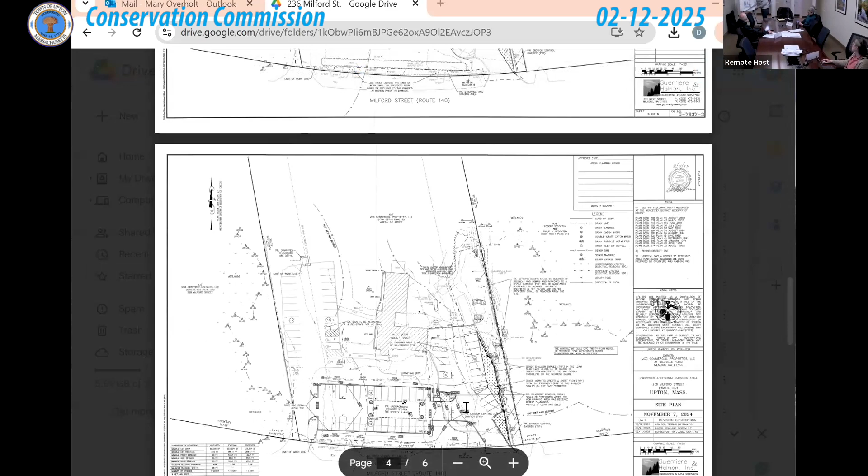And we received the approval from the planning board last night for the proposed set of plans that we have before you this evening.

If you recall, the intent of the project is that a portion of the new parking lot flows to the catch basins in this area, and there was a portion that would flow across the existing parking lot. What we proposed is to take out some impervious area on that side of the parking lot so that we'd make up for the additional asphalt being added that wasn't being captured by the infiltration system. With the removal of those 5 parking spaces, we left everything else the same so that we're more than adequately sized to handle the differential in water quality and things of that nature.

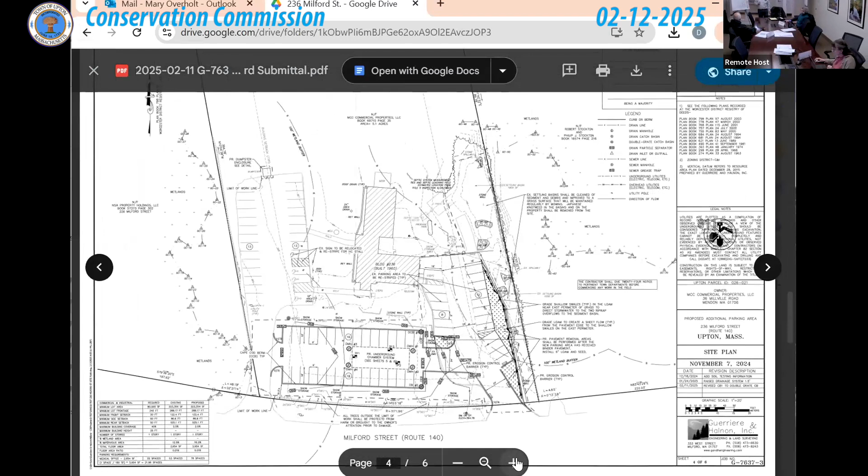So the proposed project is for a parking lot. Mary asked that we take care of the Japanese knotweed, and we propose that on the plan. There are 2 existing basins that haven't been properly maintained since the last time this was brought in, I think in 2015. So the proposed project has taken the original requirements for the O&M. We have a different owner now, so the order of conditions will go forward to direct her so that she maintains this thing properly.

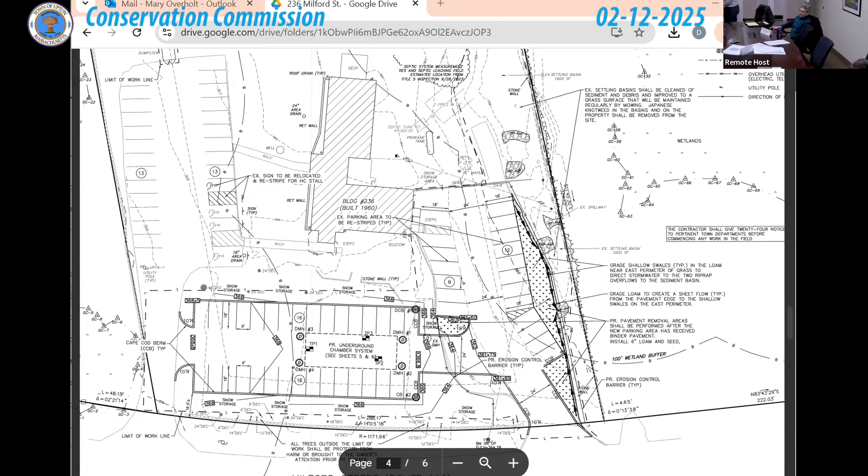So that's my presentation. We didn't add a catch basin, but we were asked to make it a double grate, so we made it a double grate. We were also asked to add an inspection port for the chambers, and we've added that—you can see that this comes to the surface at those 5 locations. So those are the changes that have been made in the site design, and I'll ask if there are any questions from the commission.

Well, thank you. Mary, any questions from you? I think I was looking at it this afternoon. It seems like you took care of all the issues.

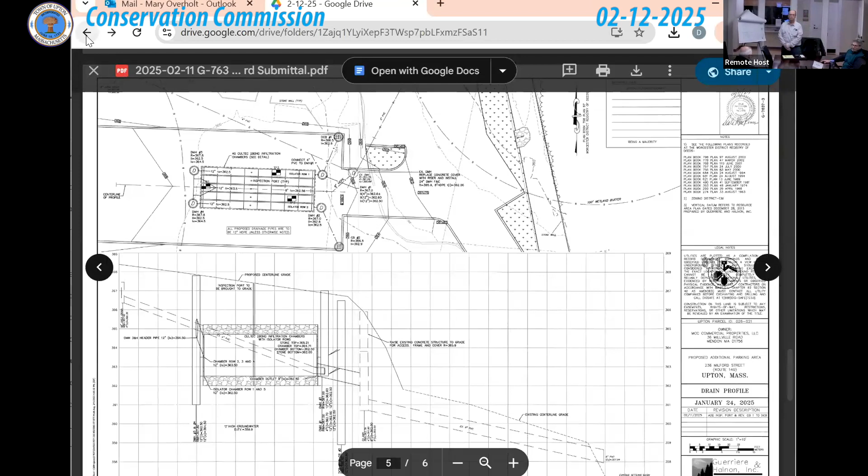Did you look at the DEP? I don't recall what it is right now, could you pull that up? Let's see. The DEP comments were: portions of the site with existing impervious surfaces may be considered redevelopment and need to only meet the Mass stormwater standards to the maximum extent practical, while also providing an improvement to its existing conditions. Portions of the site with newly proposed impervious surfaces must meet the standards fully. The applicant addresses newly proposed impervious surfaces in terms of standard 3 and 4. The applicant should provide calculations for portions of the site where existing impervious surfaces will be altered to demonstrate compliance with standard 3 and 4, and propose improvement to existing conditions. Yes, so we provided that, and that was reviewed by Stantec.

Okay, great. And then test pit data should be provided to Mass DEP. Well, I assumed—I didn't realize we had to go directly to Mass DEP, usually we just provide it to the commission. Okay, and that information is on the plans. And this is why you ended up raising the parking lot, because of the 2-foot separation. That's correct, that's why the parking lot got raised. Right, okay, all right.

And then TSS, I'm sure that Stantec looked at that, right? Yes, we looked at the O&M plan. Great, yeah, I think that was pretty much it.

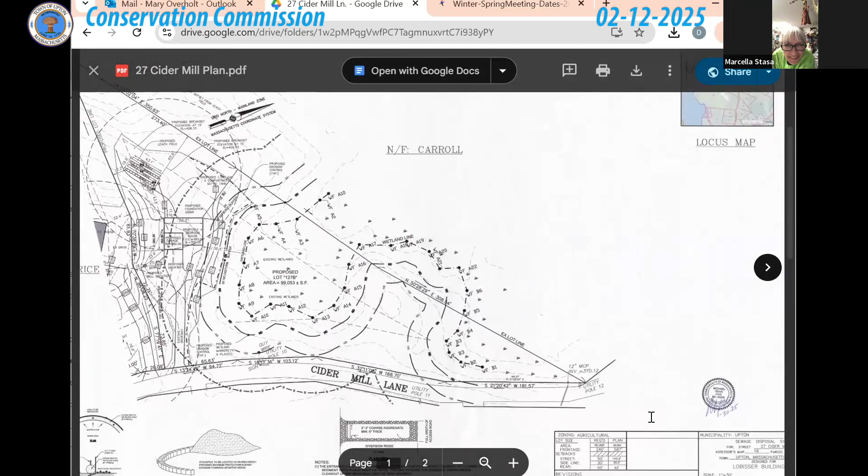That one right when you turn onto Cider Mill, right on the right. That one's actually... or is that a new one? This is a new one. Oh yeah, okay. And that one is more than 100 feet from the wetland.

Yeah, so bounds are right there. But for your dock permit, you need to go through the state for that, chapter 91. And you may have to do a determination with us. It's like a joint process, a determination with us and go to the state.

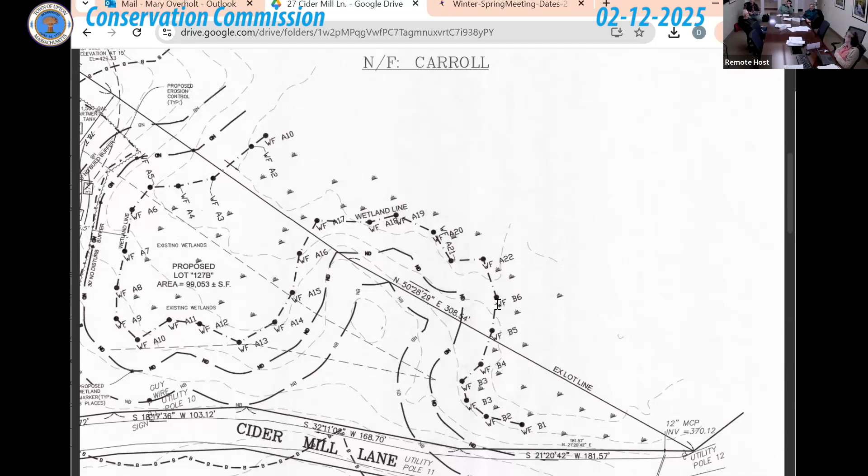Knock down any trees when I'm putting it in, right? More trees down. I didn't think there were 21 or whatever cut down, but then I was walking around and I was like, yeah, maybe. You might have counted them right. Yeah, you should see pictures of what it was like before, you couldn't really see the lake. We did just weeks before, because we saw it in like September, October, before we bought it in December.

Okay, 7:45, notice of intent for 45 Main Street, installation of a lawn drain and grass swale. Notice is hereby given in accordance with the Wetlands Protection Act that the Upton Conservation Commission will hold the following public hearing on Wednesday, February 12th at 7:45 PM: a notice of intent filed by Andrew Pickering for the installation of a lawn drain and grass swale at 45 Main Street.

I can, if Mary doesn't mind, just talk quickly. Hey Pete, it's me, Dave. I can just talk about this one, the next one. The next two projects involve Kevin Lobisser — he's not the applicant, but we're doing all the work and we've done the design work for it. They are two abutters to our 47 Main Street, 40B project. They're not connected to our project at all, not in any of our systems. It's just two pre-existing conditions that we told the ZBA we were going to try to address.

We're going to try to help the problems on each site, as we're trying to be good neighbors. On Forest School Street, we've already planted some trees for them. So we're not asking these neighbors for anything else, we're just doing it out of his own pocket. That's what me and Peter are here for, for the next two projects, so he can kick it off. We're doing 45 Main Street first, right? Yep, so I will share my screen. Let's see.

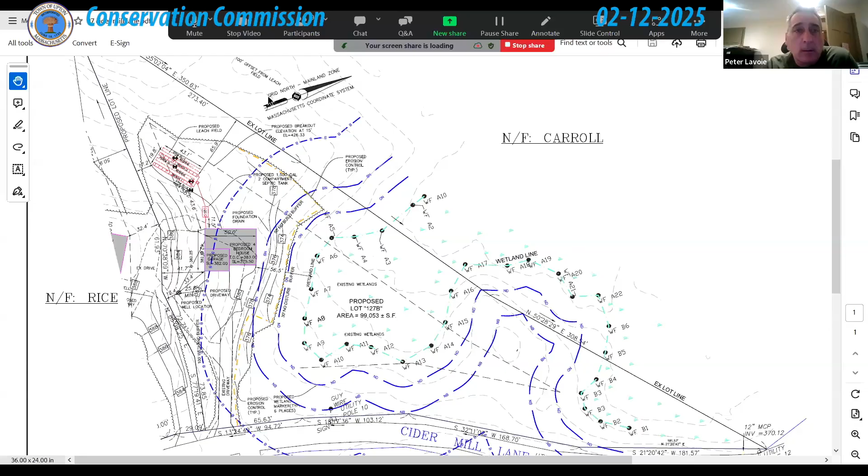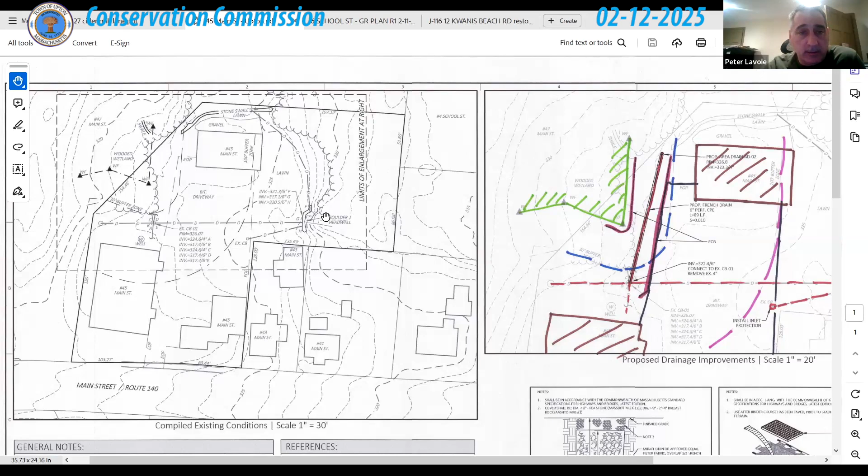So what they have designed is they want to install another drop inlet closer to the property line, near the building. They will then pipe it to the existing drop inlet located in the lawn area. They'll also do a trench drain — the top will have pea stone and the pipe will be in crushed stone — so any sheet flow that misses the drop inlet will go into this trench, down into the ground, and be collected with a perforated pipe in that trench, bringing it toward the drop inlet prior to it going to the wetland to the south.

So the reason why we're doing this is to stop that sheet flow across the parking lot, which has silt in it and cars leave some oil, so we're trying to prevent that. This will also make a better situation by installing this. The work is within the 30-foot no-disturb zone, but it's all lawn area now.

There is no vegetation, no brush or anything, just grass. So that's why they proposed it in that area. They are proposing erosion control up gradient around the wetlands - that's the pink or red line that wraps around the wetland at the top.

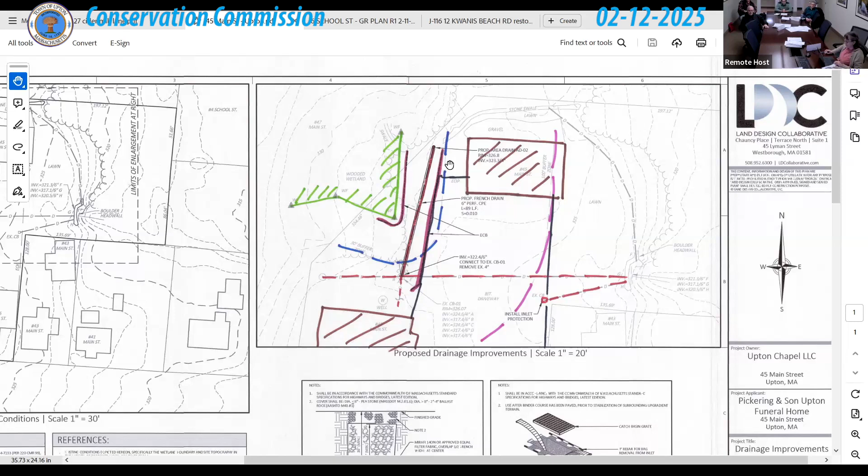I'm gonna steal the screen share, Peter. Okay, no problem, I can stop.

All right, so I believe this is the area where the proposed work is, and the existing catch basin. And this is looking from the other side. So it looks like these 2 trees might be in the way - I'm not sure, or maybe it's going closer to the parking lot. I wasn't sure about that.

I think it might be in front of them because you can see the swale, the little ditch that's coming from the wetland up gradient. If you look to the right of those 2 trees, you can see that - right there. So they want to put that drop inlet right where it comes into the grass. So I think those trees will be fine.

But when they start construction, we can stake that drop inlet and make sure we don't affect those trees. If they're in the way, we'll let you know. I'm just curious if they would be in the way. Okay.

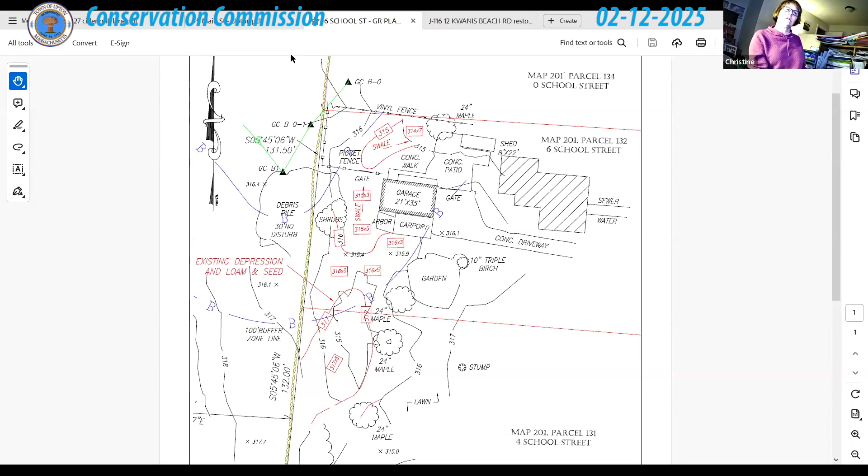Now, Pierre, do you want to defer this one to us? Do you want me to present it? Yes, please. Okay, so for the record, my name's Peter Lavoie, I work with D&L Design Group. This is another site that we had promised the ZBA that we would help the neighbors from 47 Main Street.

So this parcel is in the back of the houses, here's 6 School Street, and we didn't locate 4, but 4 School Street is, I think, roughly in the same area. I think they're set back the same distance. So you can see right on the property line, there's a 315 contour that runs along right here.

So basically the wetland, and even outside of the wetland, slopes towards this depression. And then this depression fills up, I think all the way up probably to like 316. But this depression here fills up.

So what we want to do is resolve this issue with the backyard, and we want to fill in this depression. So we're going to take that 315 contour and fill it basically 2 to 2.5 feet, so it's going to be 317.5.

So now this water will slope away, and then we want to create a swale along the back here and have it go out towards here. And then in this area here is where there is an intermittent stream that flows down towards School Street.

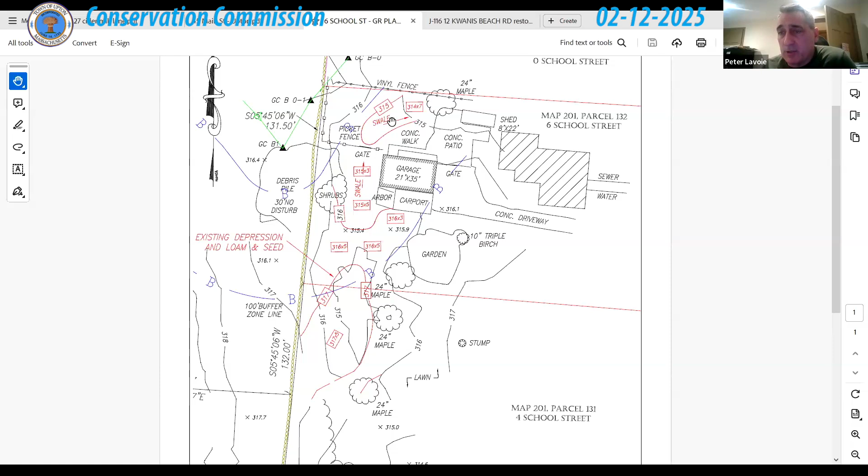David would be the person that would go out and talk to them. I know it's vacant and I know there's a pretty big... there is a stream there.

Is that lot buildable? No. Okay, well, okay.

There's also a cul-de-sac that ran along the back, I forget the name of it. All that water comes down and goes into that stream and runs down towards School Street. So you're getting all that water from that subdivision behind 47, those two roads - I don't remember the names - but all that drainage is coming down and discharging at the end of the cul-de-sac, then goes into this stream down to School Street. So I think this water we're adding is very small compared to the drainage areas already getting there.

Thanks. Yeah, it'll probably be captured mostly in the stream here.

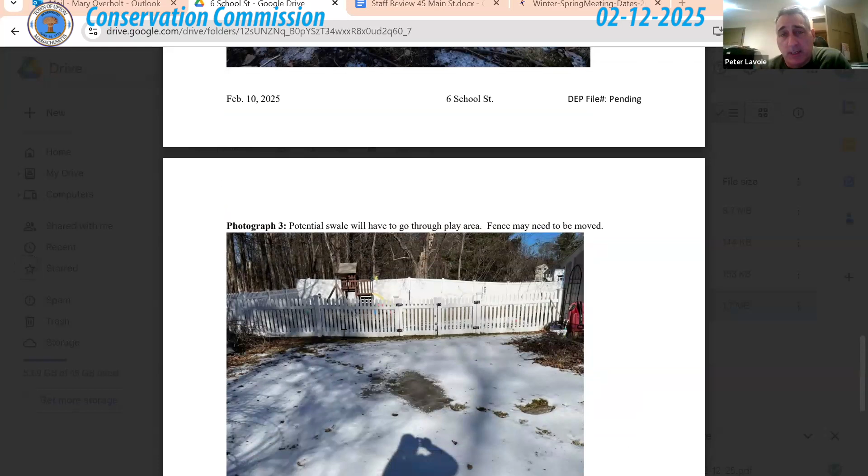Peter, you guys are gonna have to take the fence down, right? Both sides of it, or? I don't think the vinyl fence would have to come down, but I think that picket fence, to get that swale through there, might have to - that one little section - but I don't think the vinyl will have to.

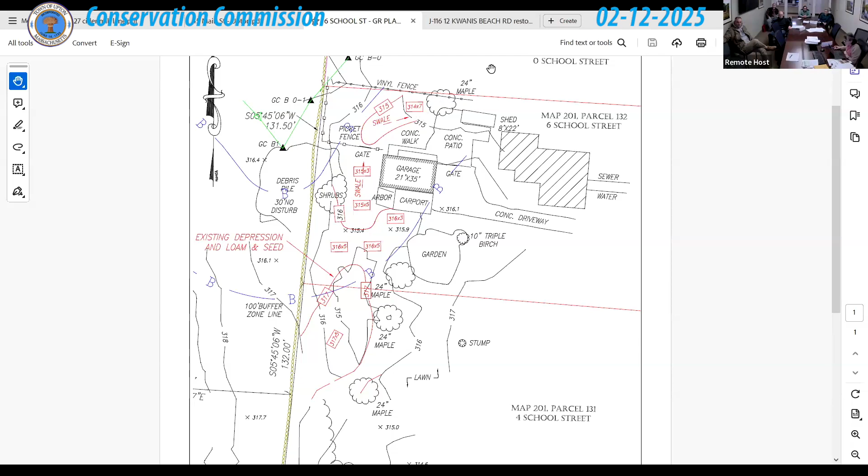I don't know if that's a tree near the concrete patio - oh, it says maple tree. So that maple tree, if you have a picture of it, that maple tree is not going to be touched, that would stay. This one here? Yeah, the one right here that says 24-inch maple. Oh, that one does not have to be moved or touched.

Do you want me to stop sharing, if you have pictures or whatever? Did you guys see my pictures earlier? Oh, you did. You didn't see them because you were sharing, but everyone else saw them. Oh, weird, okay, I overshared you, okay.

I had one question here. For all the ones that you're presenting, do you have the green card? For 27 Center Mill, 45 Main Street, and 6 School Street. Do I have the green cards? Yes, I do have them. I thought I could get those to Mary - I thought I dropped those off, but maybe not.

Okay, these are 236 Milford. Are you here for this? Okay, okay, 820, 820.

So any other questions from the commission about 6 School Street? We have a motion to continue this one till February 26th at 10:10. Okay, wait a second - second.

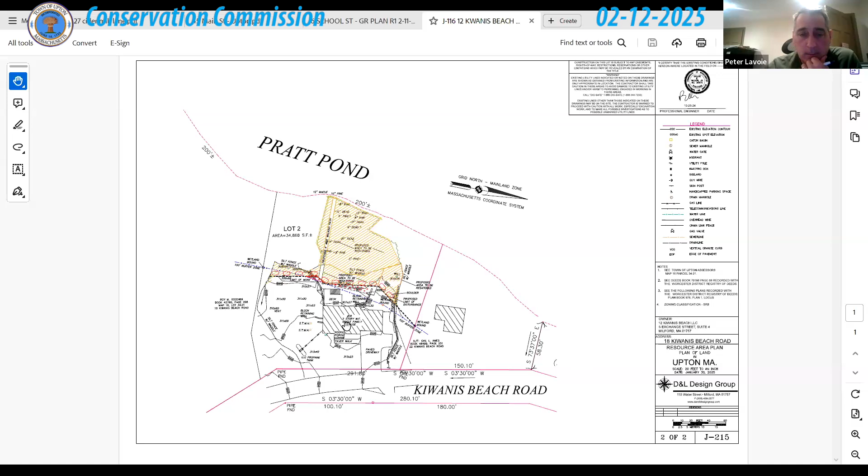Let's see. Have you seen the plan? I think I have it too. How are you liking the house? I love it, it's awesome.

My wife and I were in Westborough, so we just moved a little bit southwest. I still work in Westboro, but yeah, it's peaceful. I imagine - is it a pileated woodpecker in the tree yesterday or two days ago? It's awesome, it's huge. Yeah, no, it's great. I figured I'd stop in and say hi - my wife's down in Brazil, so I'm bored out of my mind. But yeah, no, we love it. Hey, look, if you're bored to death, come to me.

And we have, I think, 7 minutes, so we'll talk about this. Yeah, and I don't know if it's appropriate, but I was gonna ask - I know we can't build anything there, but can you clean it?

Can you remove debris and leaves? Can't touch it, anything. What about a picnic table? You can't put anything there, not past those - they've already gone a lot further than they're supposed to. Well, the way the bylaw is written, that first 100 feet, there's supposed to be nothing disturbed at all. It just says permanent construction, right? It's not temporary - you can't put a chair there.

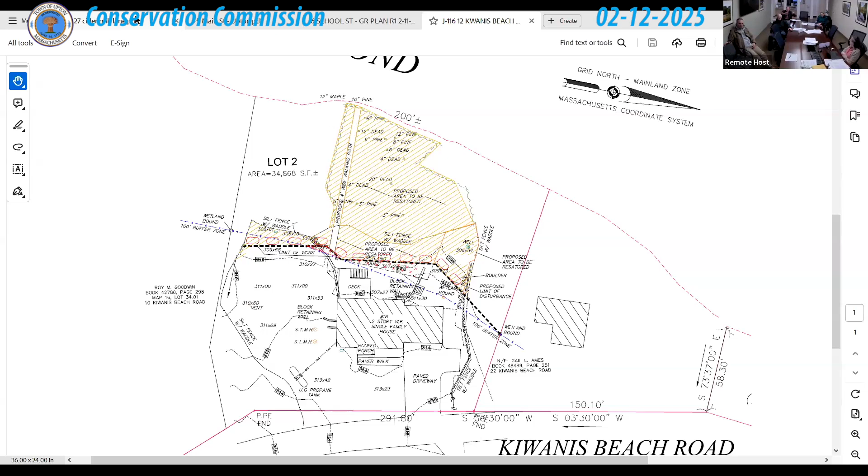Yeah, but I got the office next to the big living room with the total glass, so that's okay. I don't have to go out there, not just to see it. I can sit inside, you can see it all there.

Nice, and then they put the gravel path. What was that for? Well, that was part of, they asked for the gravel path and that was approved. So that's where the dog's gonna have to go off the gravel path. It's not going anywhere else. Yeah, I could have another one.

So, the other thing is, you know, the neighbors and stuff, they can't do all these different things, and that's why you can't. Well, they already did them. Well, they were grandfathered, right?

Oh, some, right, yeah, some of the older houses have grass down to the lake, but those are grandfathered, those are from a long, long time ago. And junk like that near the lake as well, right? Yeah, maybe in a few spots.

They're, you know, different sets and different codes. Understood, yeah.

My wife's Brazilian too, I'll make sure she understands, but stuff to stop her from cleaning - she's gonna be. Well, it's just, it's the woods back there. And so when you go, in the fall raking leaves and stuff, it'd be nice to have a pile somewhere else on your property, closer to the road, not so much in that area.

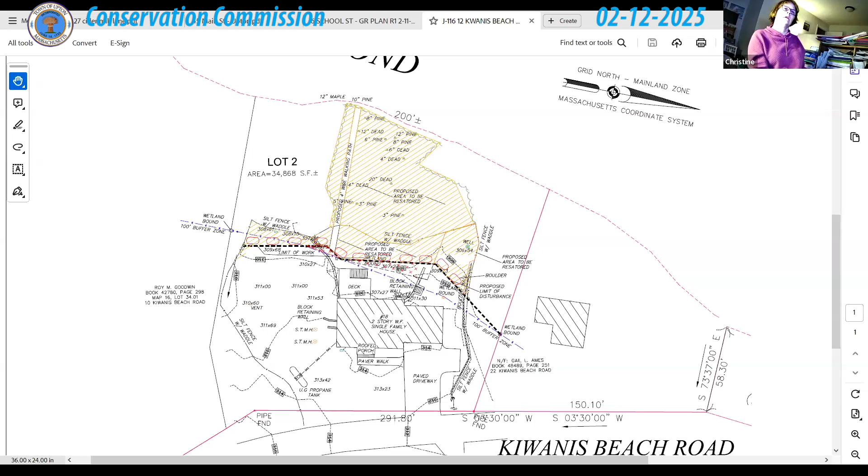Thank you. Any other comments from the commission or the audience? Hearing none - do we have to continue this one too? No, I have a DEP number on this one. Yeah, this one we can approve. I'm just showing the restoration.

So when they get ready to plant in the spring, since she didn't give exact locations, I think we talked about last time just staking out the locations of where we thought they should go. And then me approving that, and then they get planted, because obviously they're gonna have to put them in between existing trees, et cetera, to make sure they go in good spots. I think Mary Ann was going to work with them, so we'll have some kind of checking in place for when the plantings go in.

So Peter, would you like to close this one? Yes, I would, please. Okay, let's hear a motion to close this hearing from the commission. I'll move. Second. Okay, let's do a voice vote.

Chris, aye. Ellen, aye. Marcella, aye. Shannon, aye. Sandy, aye. Mike... Okay, that's the unanimous vote of the commission.

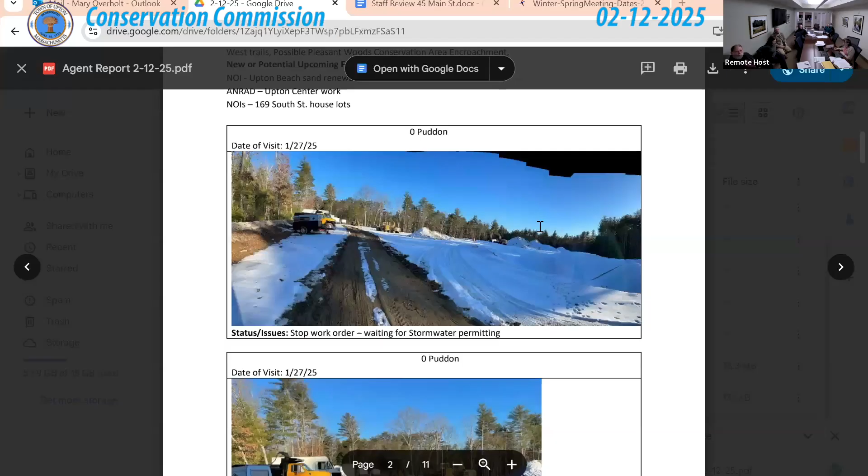So this is - there's a pretty big access road into the site. This is standing right where you can just start to see the opening, looking at the site. And as you get further in, you see there's a bunch of trailers and vehicles, et cetera, and then a big open area that's been cleared. You can see the large stockpiles of material.

And I did want to ask you about this. This is between, if the road is up here, your crossing is near there. This is kind of between your developed area and still in the woods. It looks like there may be an area of ponding here.

Potentially a vernal pool, maybe not, who knows, but it's a depression certainly. Oh, it's like a kettle pond. Okay, it does get some water, but then it drains. We've already had a botanist look at it and it said it doesn't qualify, doesn't support life or something like that.

Well, it's good you had it checked out. A long time ago, we may want to look at it in the spring just to see if there's anything there. It's hard to tell, it's very sandy soil, so it does drain pretty quickly. So it's a nice little natural detention basin.

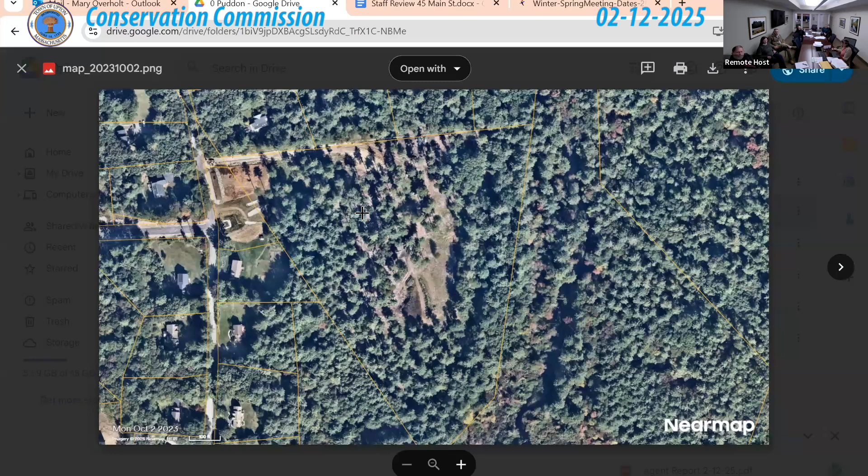So this was in 2023, picture of the site. And this was April 2024, so the trees have been cleared. This is July, starting to see some earthwork being done. This is how it looked in October.

Mark Allen, Mr. Allen, did you have plans or something you wanted to share? Yes, hi, Mark Allen with Allen Engineering, representing Melody Needham. We have been working with Melody over the last 6 or so months, and we have taken over the project for civil site engineering, and then previously to that, it was Andrews Survey and Engineering.

We have prepared a septic system design for an additional unit on the property, and we submitted that to the Board of Health a couple of weeks ago. And then we got your letter, the Conservation Commission's letter, January 23rd, 2025, which basically issued a cease and desist order.

So we have then since sat with Melody and done a lot of history on the property that she's owned probably since 2014-ish. And we've gathered a lot of information, and we have found that she's attempted to exhaust all of her environmental issues, trying to stay out of the buffer zones, out of the riverfront area, out of the endangered species.

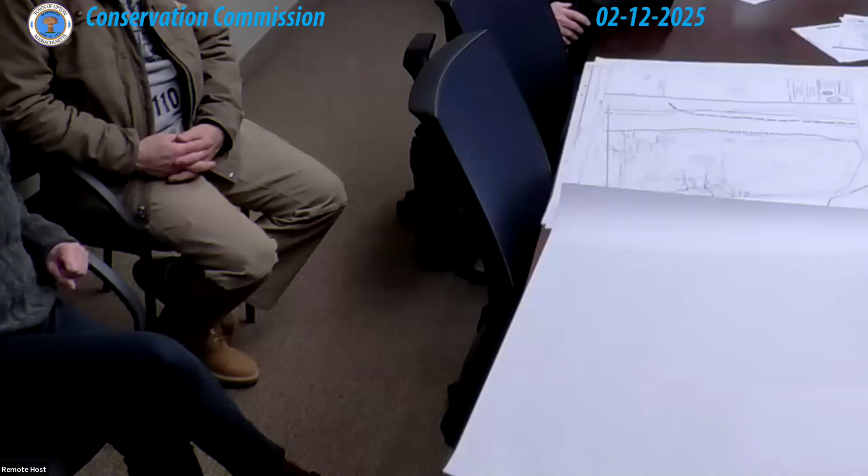Yeah, the septic system, I think, goes right about there. I can share a master plan if you'd like on my screen, if I could share my screen. We have a septic system that we submitted to the Board of Health. Sure, that'd be great to see. Hopefully you can share. Yeah, let me see if I can.

I see your screen, so that's a good sign. There's something.

It's the septic system. So the parcel that we're talking about is about 23.86 acres. It's a big parcel, on Moon Hill Road in Northbridge. The town line is basically in this area here, so the area that we're looking at is in Upton. The parcel that Civil Site Engineering had designed and approved was a septic system for one house.

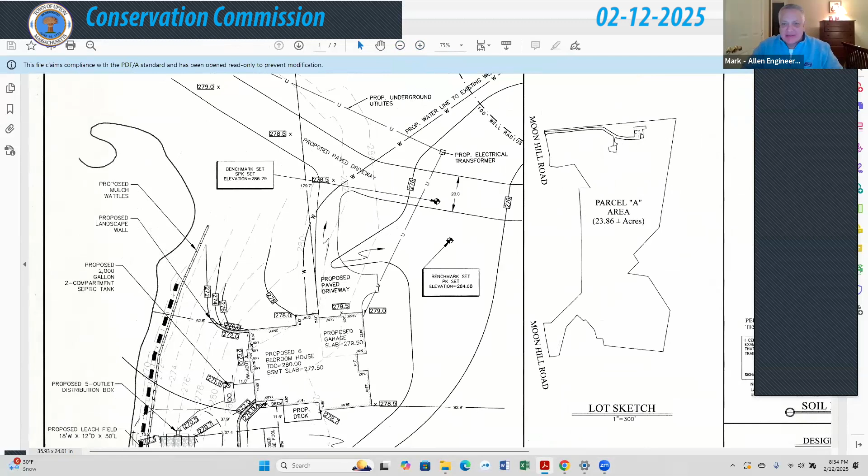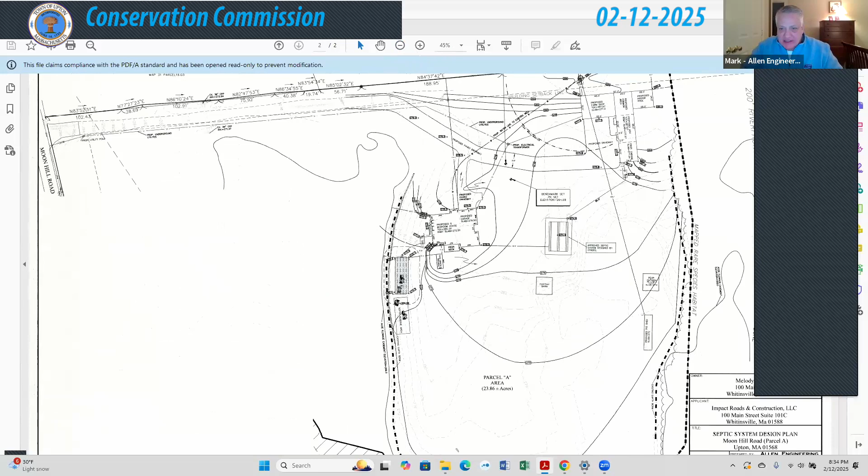And we came along and we're working with Melody now to do a septic system in this location here for the secondary piece. The second sheet of our set shows the limits of the work - this being the initial septic system that was approved, which started the clearing and earth removal in this area. The finished grades are going to be very flat, a small crown across the property. The secondary unit is in this location here, the farm stand and the ADU unit here.

And what Melody has done over the course of time is actually install a wood chip sort of mulch berm around the entire limit of work, so that no stormwater runs off site without getting some sort of filtration through that mulch berm.

So we know what the grades are going to be, and we're working now with Melody to create a swale system around the entire limit of work that's outside of any mapped rare species habitat, outside of any riverfront area, outside of any depression which was earlier brought up, which is in this location here, so as to mitigate any delta of stormwater runoff between the previously wooded condition, which had fairly steeper slopes, to a flatter slope with new flatter uses that are going to have chicken coops and barns and farm structures on the property.

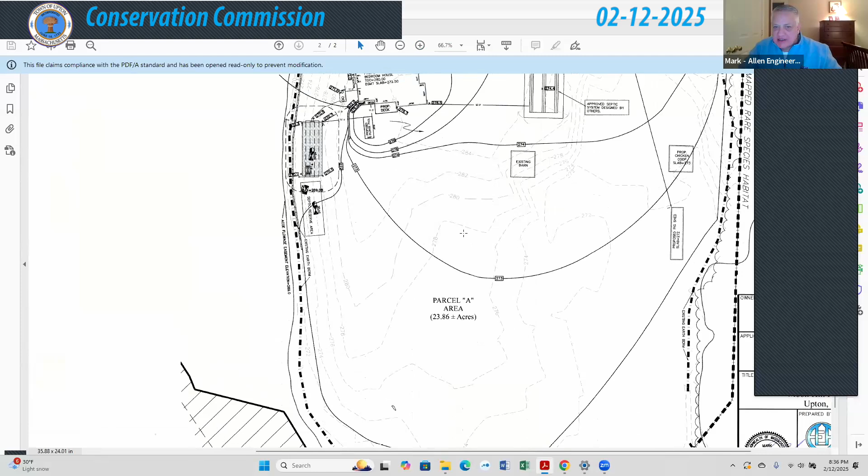So we know what our task is. It was a little bit of short notice to get all the information in tonight for a land disturbance permit, but we are working with Melody to file the applications, get the abutters list, get the public hearing notice, get the operation and maintenance plan together, and all the necessary documents to come back to you folks.

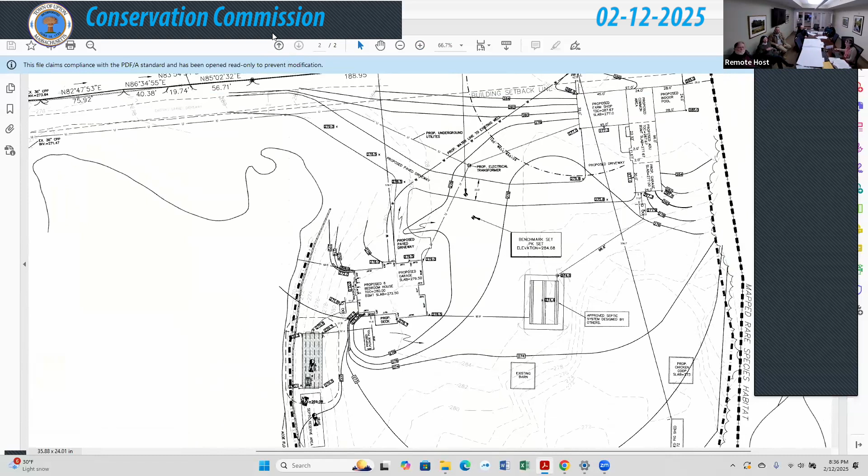Great, well, I think that's great. Looks like you guys are making good progress. Are you able to share how long it might take to get that ready for another meeting?

Yeah, so we're shooting for the next hearing. What's the next submittal deadline for getting the legal ads in the paper and information to the commission? You'd have to be pretty quick to get on the next one because the deadline's tomorrow at noon. Okay, when's the next one? Second Wednesday in March. So the next deadline would be February 27th at noon.

So probably get on the March one. That would probably be a little bit more realistic. Yes, the March 12th one absolutely. I'll stay up all night, but I know I won't finish.

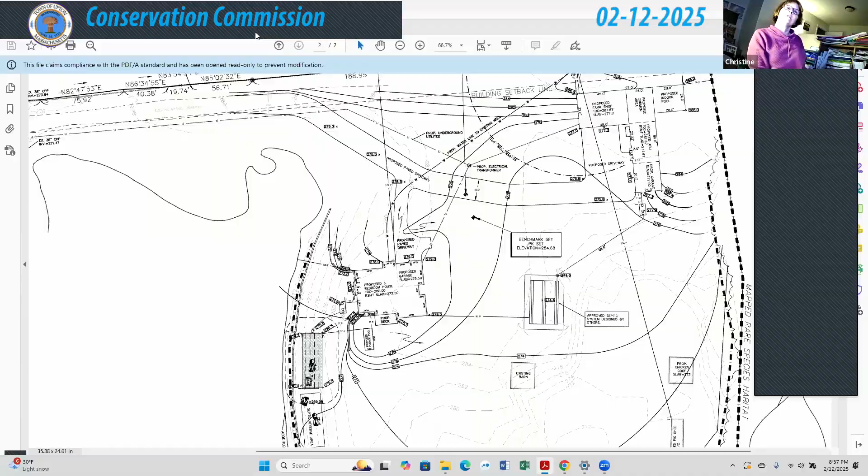So any other questions from the commission? Yeah, this is Mike. I really didn't get my question totally answered.

Mary, have you talked to the town planner about this? They have talked. Are they okay in terms of any other town bylaws? Has topsoil been removed from the site? Could that be an issue? I would like kind of an independent opinion on those issues.

Yeah, I'll definitely touch base with Mike and Joe. I believe if sand was being removed and sold, then it should have had a permit through the Board of Selectmen, I believe.

But I think that's probably the main question. But right, so we'll check. So will we wait until Mark has the things filed to put on the agenda? Yes, we won't need to continue it because we'll wait for the submission.